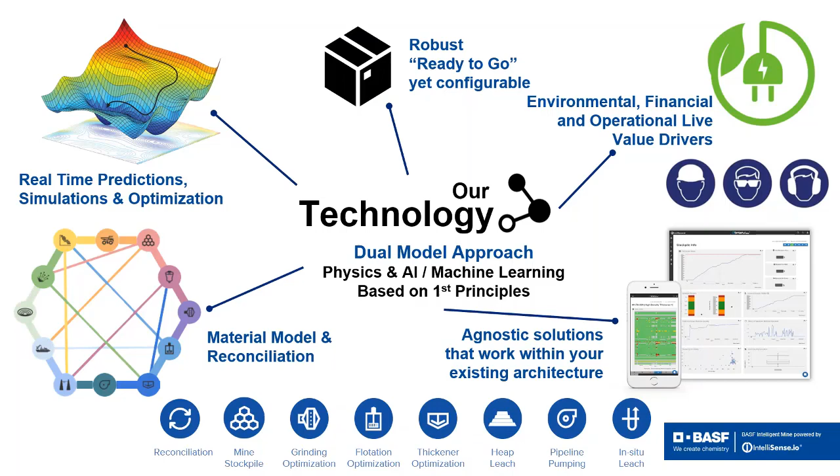So as an example, let's think of, say, ore hardness. Then this will impact your grinding rate, it's going to impact your wear inside your mill, the resulting P80, which then influences your flotation, your thickening processes. Our models, our grinding, our flotation, our thickener applications, they all use this information to help provide real-time optimization advice for these individual places. Let's now look at your actual process and see where you fit.

So first, of course, we begin with the mine and the plant. Within that, we're expecting to see a whole series of processes that we have applications to support. Each one of these processes are going to have a series of sensors, a series of instrumentation, and your native control system. And all this is sitting on your OT network.

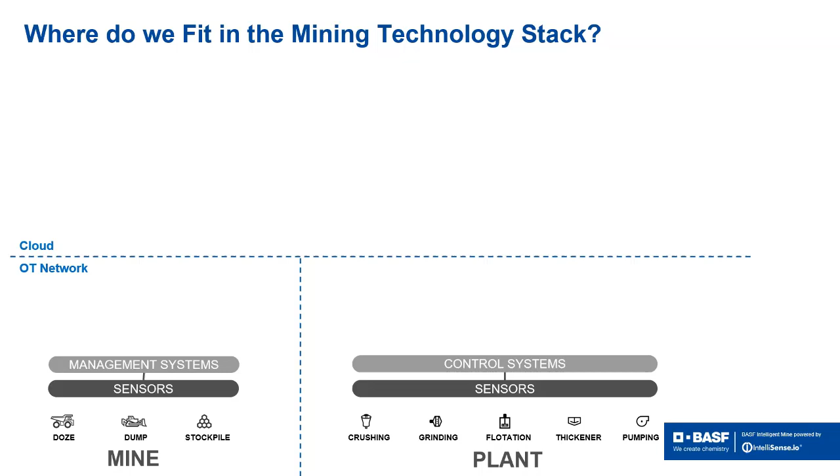What we then have is, in addition to those things, you have all these other data sets. So you might have, just looking at a few of those here, your block model, maybe some manual data, your ERP system, your maintenance system, even your own data lakes. And all of these systems, they all feed directly into our Brains app.

And what we can then start to do is we can do some high quality data analysis and data cleanup to ensure that the quality of the data that's coming in is spot on and ready for use. We then build our material model and this transport model to basically start to understand how all this data connects. And from that point, you can then start to do some advanced analytics based on this information. And more importantly, start to get some real-time predictions coming out of that info and even real-time simulations.

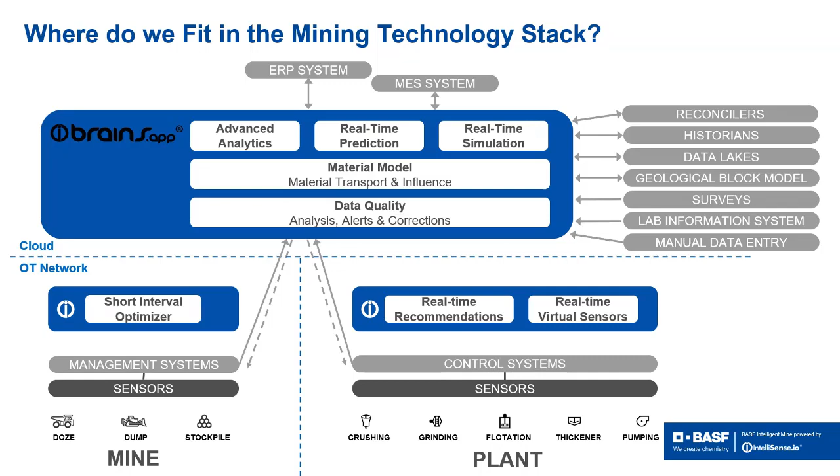The ultimate aim of our products, though, is to provide, in addition to all these things, some real-time recommendations and real-time virtual sensors. So that information then is fed back to your operational team. Now we can feed it back through either an open loop, i.e. straight through to your operator via either a web interface or directly through faceplates so that you can have it in your DCS system, or we can actually close the loop as well and actually write directly back to your underlying control system.

So maybe just a different way to summarize all of that is we're trying to help your site make better decisions. So if we begin with helping a team to describe what's currently happening by looking at new insights from your data using the data lake, we can then start to look at diagnostic things about why things are actually happening using BrainsApp. The next thing we can do is start allowing our prediction and simulation models to support your operations to make better decisions in real time.

So you notice here that the human input is getting less and less. The final thing we want to do, of course, is to give you this optimized result and actually feed that through. So reduce the amount of human input to make really good decisions, and maybe even close the loop completely, and then make direct action in your underlying control system. So that's the general story about what the product is and how we've come together. Let's have a bit of a look at the actual portfolio itself.

So BrainsApp we've spoken about before, that's our underlying platform. Next we have our Brains VOS. VOS stands for Virtual Operations Simulator. And all this is, it's just an historian of all our predictions. With that, we can run non-intrusive simulations to really help understand opportunity lost. And we monitor the accuracy of the predictions by comparing them against the actual test results. That's a really good way of understanding how well the models are working.

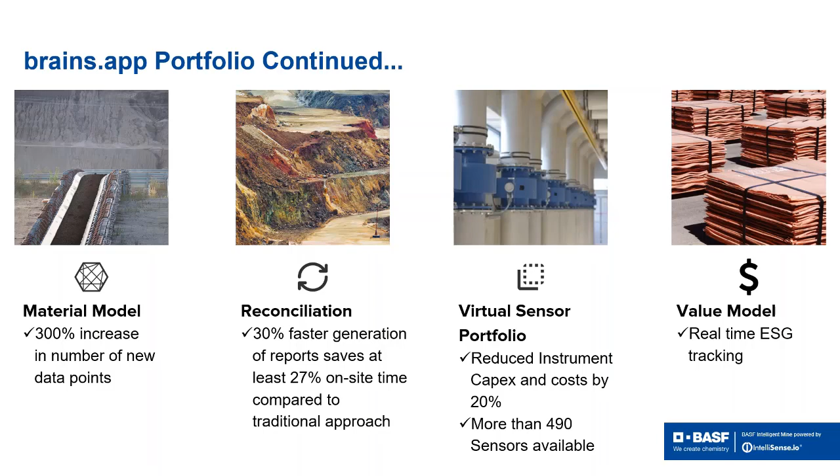Then value models, a special class of virtual sensor. The idea here is that we try to accurately calculate and predict your asset operating costs in real time. It's looking at trying to find the lost opportunity or the value generated as you move through using our products. A quick look at the actual applications. These are just five of the ones that I've chosen. I'm going to do a bit of a deep dive into grinding, thickening, and flotation.

But we have stockpile. What stockpile is trying to do is allow for real-time spatial modeling of your stockpiling process. We're taking information from your block model and all your truck movements, and then giving a really high level of spatial detail, both in time and area, about what's actually in your stockpile. That allows you to manage and feed that information into your plant as it's coming through. We have our grinding application. This one guides your mets and your operators to optimize for throughput, stability and overall equipment effectiveness.

Our flotation app supports operation of the float circuit by trying to increase mass pull and improve recovery. We've got a number of really interesting virtual sensors that look at things like gas holdup and bubble size, and we provide guidance on optimal airflows and chemical usage.

The Thickener app recommends a whole heap of set points to your operator and control system by doing real-time prediction, simulation, and optimization to ensure your thickener runs really robust and stable. It optimizes your underflow density to either maximum or whatever number you're targeting, maximizing your clear water, and optimizes your chemical use. And the last one there is heap leach.

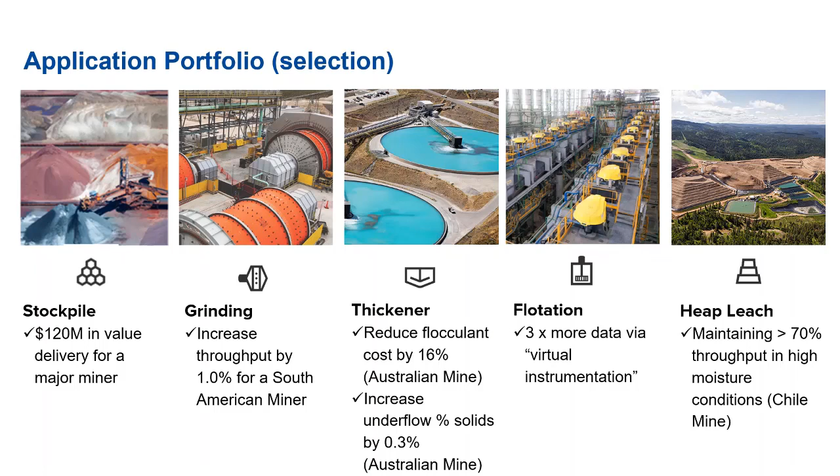Heap leach is sort of the reverse of a stockpile, but the idea here is that we can give you a lot of insight into how to operate your leach circuit on that heap and how to actually optimize your metal recovery. Let's have a look at grinding and some of the problems that we think the industry has and some of the solutions that we've looked at.

The first problem that we're going to look at today is liner wear. We know the performance of a grinding mill depends heavily on the condition of the mill liners. The problem is that most operations don't actually know what state their liners are in unless they physically stop and inspect it. Now that's a costly and potentially hazardous exercise.

The second challenge is ball charge. Knowing the ball charge level is critical for good mill operations. Having the wrong ball charge can have significant impact on your grinding efficiency, and stopping the mill to inspect the number of balls inside is going to impact throughput. So our solution

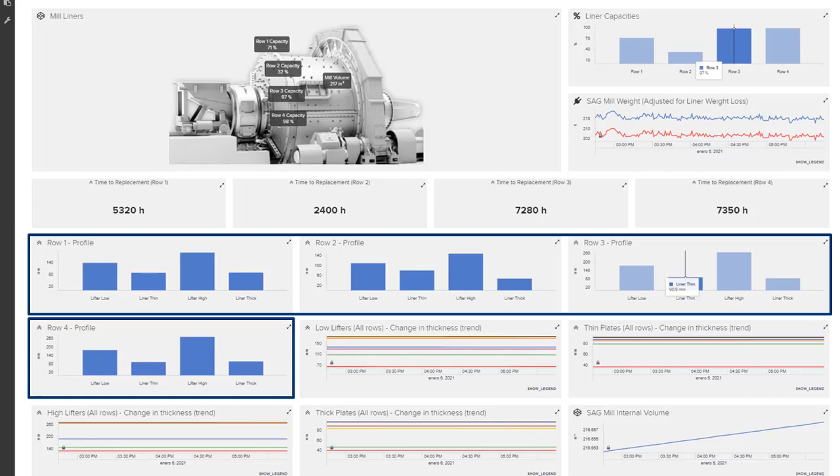here is we create a series of virtual sensors that estimate both liner state or wear state and mill volume. The liner state is critical for understanding the mill efficiency and particle trajectory. The mill volume is important in estimating the charge: how much is balls, how much is material.

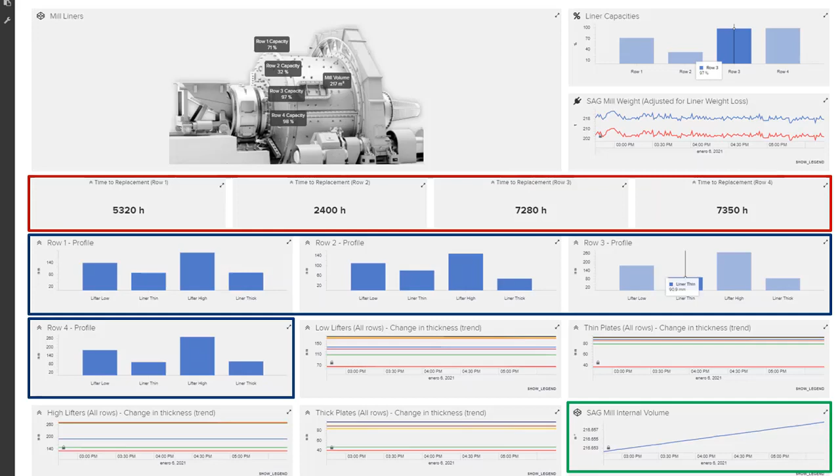We then have a series of sensors that predict when the liner needs to be replaced. You can see here it's predicting the number of hours into the future that you'll need to replace your liners. This improves the performance of your mill because you're stopping less often on unplanned liner replacement and maintenance events, and thus it increases your overall throughput through the mill.

For ball charge, our solution is a number of virtual sensors that allow the operator to see in real time the current ball charge and then prompt them when additional balls might be needed to maintain the right level. You can see there, this is telling the team they need to put some more balls in. This stabilizes the grinding performance. It avoids unnecessary ball or mill liner costs and prevents unnecessary stoppages, thus increasing your throughput.

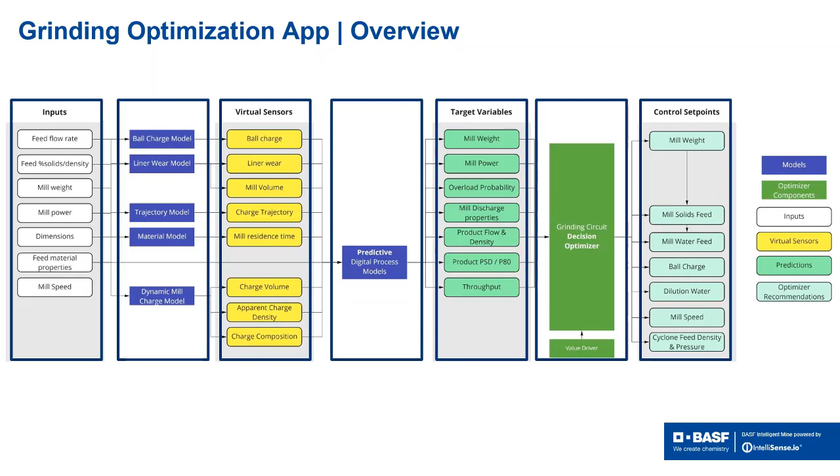So that's grinding. Let's take a look now at thickening. One of the most critical issues that many thickeners face is probably the variability of ore and the effect its properties have on stable performance. Unexpected events occur, and when they do happen, each team member reacts differently, be it an individual or across a shift. And if in doubt, they tend to run the thickener at a less optimal level just to stay safe.

The second significant issue caused by these changes in ore properties or process changes is the reduction in optimal density, clarity, rake torque events, and floc usage.

So our solution is, I've tried to put a single chart up here to show you what's going on, and it's way more complicated than this, but it's tried to combine the material model, so we know what's coming, with other upstream applications if we have them, and put them all into our prediction, so that we can actually predict what's happening to the thickener one full hour into the future.

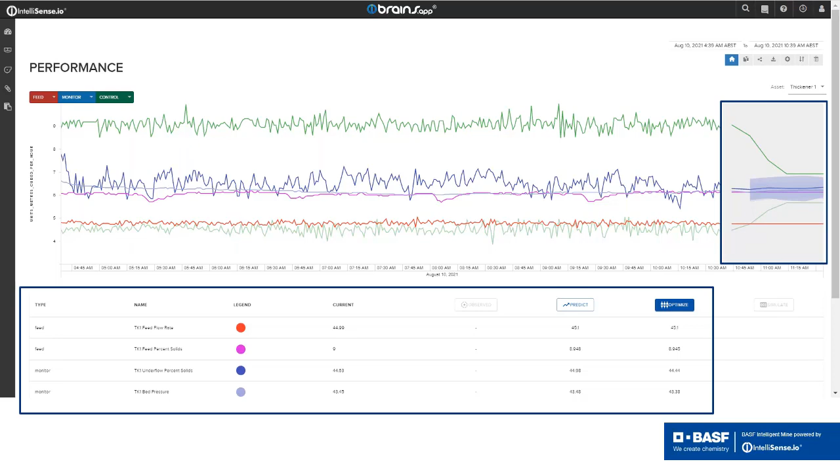Now, based upon that one full hour of optimization, we can then apply that to our optimization models and give real-time live optimization targets for things like underflow pump speed and flocculant dose, just to name a couple, to make proactive changes to the system now for what's going to be coming in the future. This results in stable thickener performance, even through changes to your ore or operational changes. Additionally, it allows the operator to focus on the source of the disruption rather than trying to fix the downstream impact of that disruption.

Our solution also allows operations to set rewards and goals that our models target in real time. So this is trying to make it as transparent as possible. As conditions or key drivers change, the team can then adjust the models to target different KPIs. In the example we've got here, we're targeting bed pressure. So we've set the rewards and the goal to target the lower limit and avoid the upper limit.

Let's have a quick look now at the underlying part of the thickener app. Again, we've got those input feeds. We've got a number of virtual sensors and models. They get combined into the prediction. We try and predict these items. From those predictions, we feed that into the optimizer, and the optimizer gives you control set points around these items.

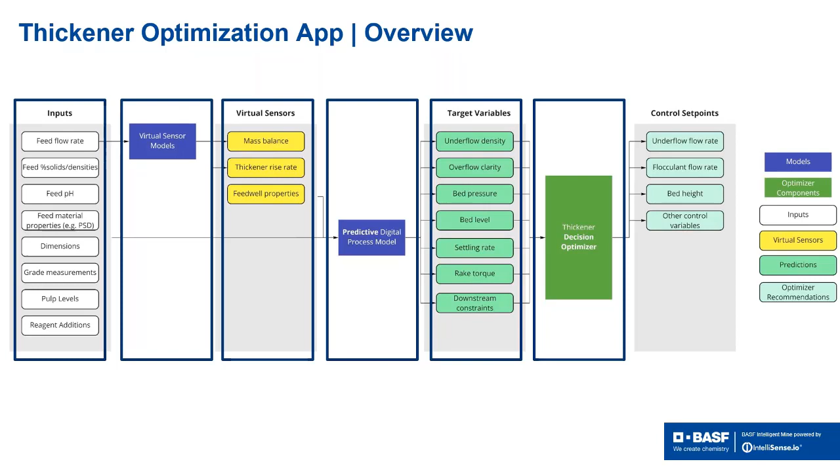Take a quick look at flotation. In flotation, operators are often unsure whether they're using the right amount of air and reagent in the flotation cell. Additionally, they often don't know how each of their flotation cells or individual columns are performing and how they're contributing to the overall recoveries. So our solution is to provide a number of virtual sensors to give insight into real-time recoveries. This is an example of multiple roughers, and the red line is the target recovery. You've got two sets that aren't hitting it and one set that is.

We also look at real-time bubble size and real-time bubble area flux. When you combine all that together, we can start to give recommendations about the airflow required to maximize or optimize all three of these parameters.

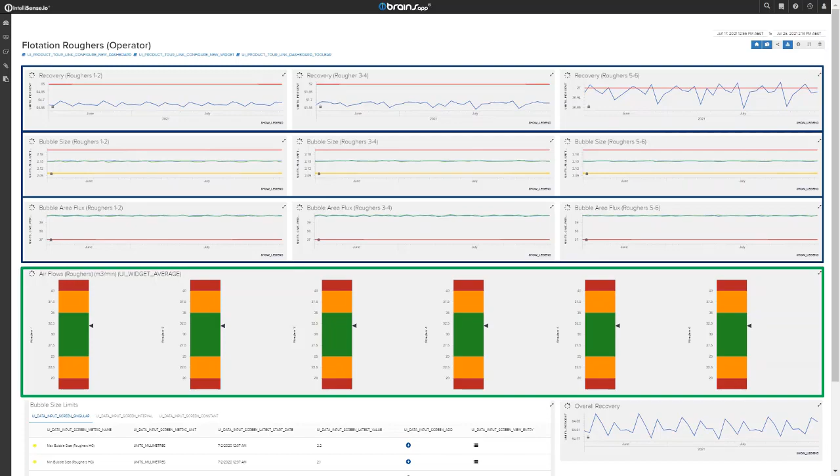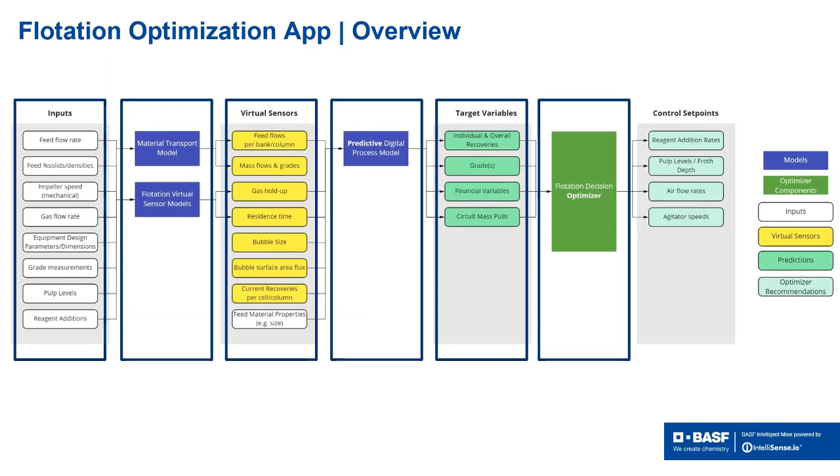So once again, if we look at how our apps are built, we have a number of inputs, and we have our models and the virtual sensors those models create. We combine that together to start making predictions. We predict these items, then feed that into our optimizer, and the optimizer gives you feedback in terms of control set points for these items.

So in closing, we think our unique approach delivers continuous value. The traditional approach to digitalization, we think, is a high-risk approach where providers create custom builds for each site. That needs high upfront costs and focuses on adding more instruments to get more data. This approach takes longer to implement and needs maintenance, usually by you, the client, to ensure the models are adapted for new operating conditions.

What our solution does is take advantage of implementing pre-built models, based on this first principles approach, with process and chemistry knowledge built into their core, reducing that upfront cost significantly.

We make use of your existing instrumentation and create new data via virtual sensors, eliminating the need to spend capital so that you're digitally ready. The result of this is a rapid implementation journey. It probably takes between 3 to 4 months per application, and this provides fast value realization.

Of course, now our offer is an optimization as a service. So what this means is that we're your ongoing partner beyond the implementation. We update the models, we upgrade the applications with new features and functions every 3 months, in fact, 4 times a year. Plus changes to your process flow are incorporated directly into those updates. Our goal here is to deliver success, not just software, and it's by combining all of these strengths, I think, that we are able to achieve that.

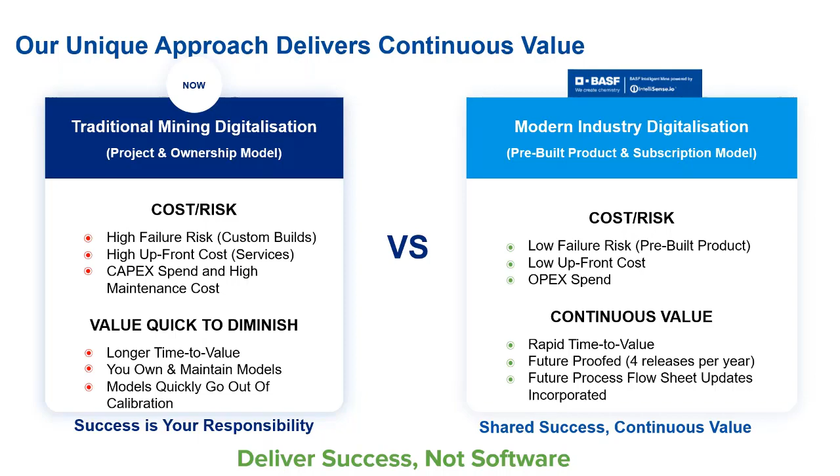Sheldon, I'll throw it back to you, I'll stop sharing and we can start the Q&A. Fantastic. Thanks a lot for that, Ken, and certainly interesting to see the approach BASF have taken there to digitising your offering. And a very interesting journey you've been on. It's quite a breadth and scale of applications there that you now cover, and quite unique and impressive the way you're utilising and generating that information to drive operational transformation. So thanks a lot for that.